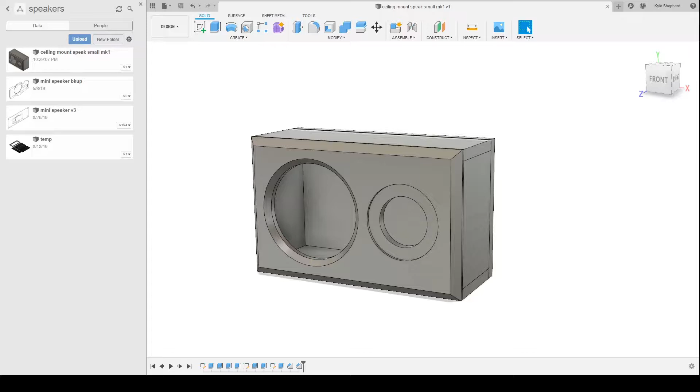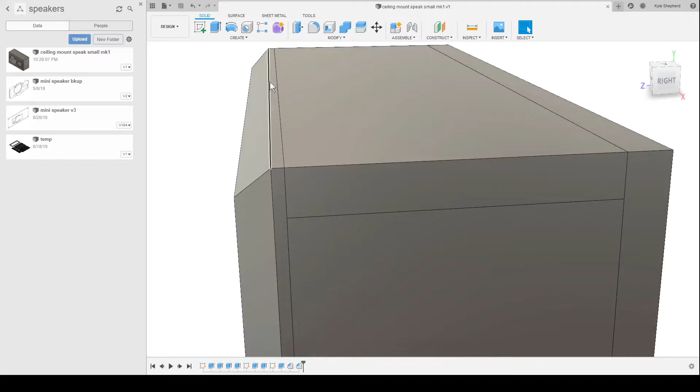The next thing I wanted to go on about was, and I've been thinking about this design, one thing I need to consider is I want to put a veneer on the outside. The veneer is just a thin layer of actual wood, so it has all the actual grain, and you just glue it on pretty much. So what I want to do is push this baffle plate out a little bit more, so that the veneer is sort of trapped behind this, and it will look a bit better.

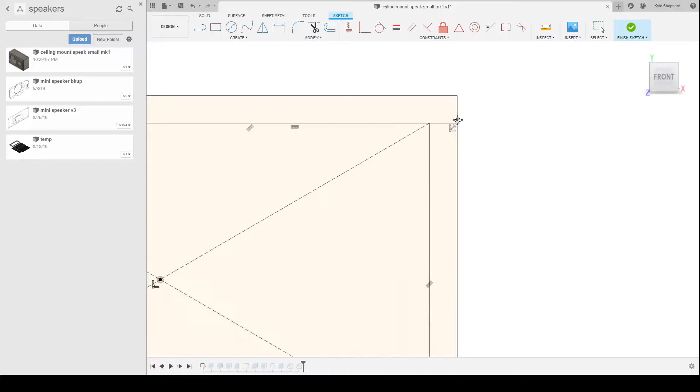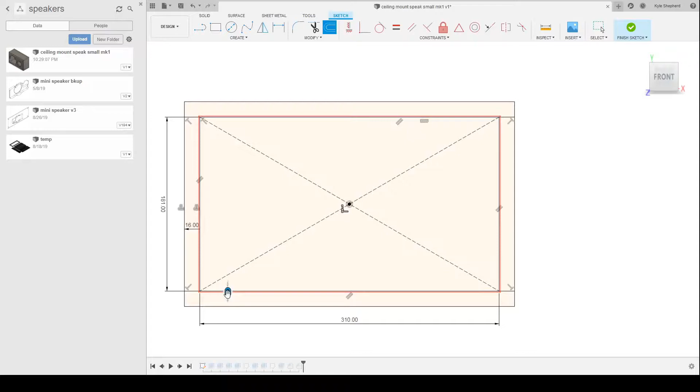So what I'm going to do for that is edit the sketch for starters. So just selecting this whole outer ring, adding another offset, which it won't let me. Okay, so there's already an offset. So I can add an offset to an offset. Great. Why not? Come on, let me select the whole inner. So I'm selecting the inner original square again. There we go. Oops. So now I'm making a completely separate offset.

So we had 16 originally. So say the veneer is only like, I think it was 0.3 millimeters thick, which is tiny. So to have the outer edge of the baffle in line with that, but I want the baffle to go over that by, let's say 4 millimeters.

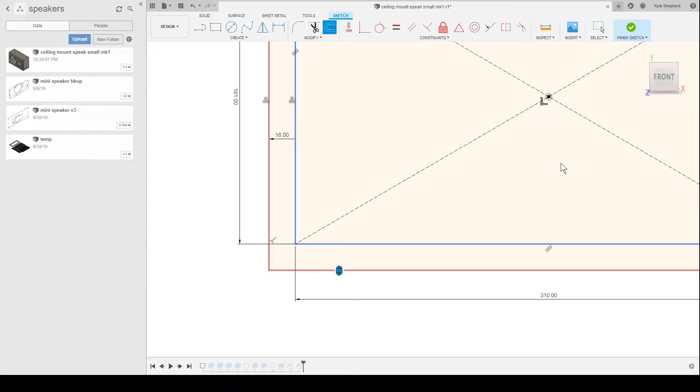So that's not going to affect anything because what I added is sort of in addition to everything, to my selections. I haven't edited the selections that I've made it from. What do I mean by that? So if I edit this, there we go, I can select that. So see how I'm adding part of the selection to this. So that's now made this have that additional offset, and it should all apply.

Okay, so the chamfer here didn't work properly. So let's have a look at that. That looks pretty neat. But I think I prefer it. Yeah, I prefer it with both edges.

So I think I might cut, this is nitpicking, but I might cut this down by maybe 2 millimeters. Play it safe and I'll go to 3 millimeters. No, you're not even going to see that, are you? 2 millimeters. Notice all this changes automatically. That's the wonders of parametric design.